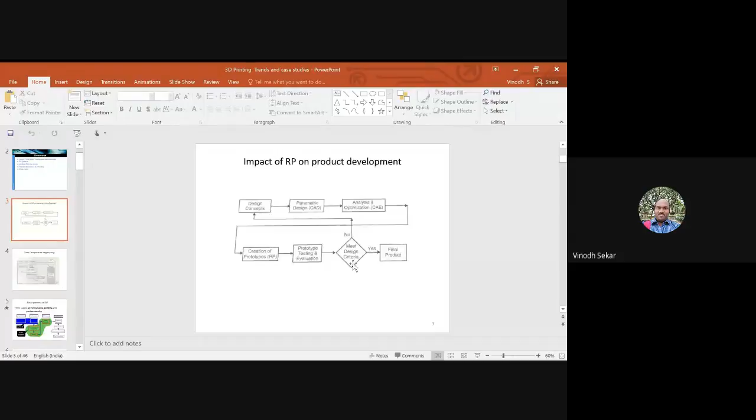Let me show the slides alone which I covered earlier. I started with the impact of layered manufacturing technology on product development, then discussed time compression engineering, covering both sequential and concurrent approaches and the significance of concurrent approaches. We discussed the basic mechanism of layered manufacturing, and then the fused deposition modeling process, where the raw material is in spool form, fed to a melting chamber with heaters that heat the polymer, and through the nozzle the molten polymer gets deposited layer by layer. We covered layer formation, advantages and applications in FDM, and now we move into the stereolithography process.

As I mentioned, the raw material is a liquid resin held in a resin tank, and a UV laser is passed onto the resin to cure it. It follows a point-by-point approach to create a layer. The layer is formed by the laser passed onto the resin tank, tracing point by point to build the layer. Once a particular layer is formed, the platform is lowered, and again the laser is passed so the resin is cured. This way the layer formation gets completed, depending on the number of layers needed as part of the build.

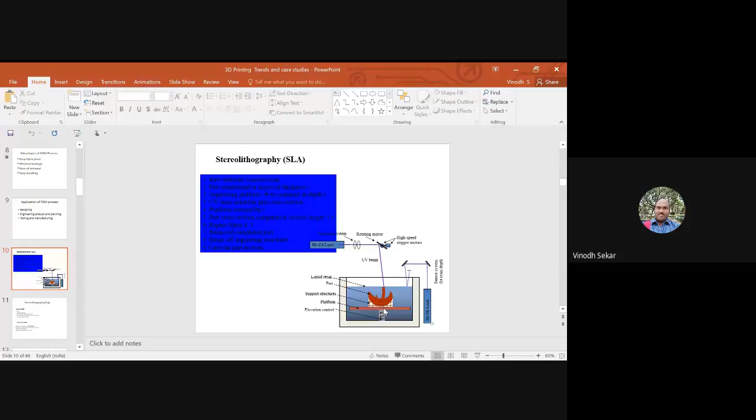The type of laser used is a UV laser. There are different advantages of this lithography process, and as per ISO classification, while fused deposition modeling is an extrusion-type process, stereolithography is called a photopolymerization process, specifically VAT photopolymerization. One unique advantage of the SLA process is good resolution and good dimensional accuracy. The equipment is slightly costlier since it involves a laser and corresponding optics, but the process offers good dimensional accuracy.

When the laser beam is focused to a spot size of about 1 to 2 micrometers, we could create thin layers of the order of 1 to 10 micrometers. So in this context, it has very good scope in this kind of precise applications, for example in automotive and aerospace component industries, even in medical applications. The reason is the advantage associated with the stereolithography process in terms of very good dimensional accuracy of the part.

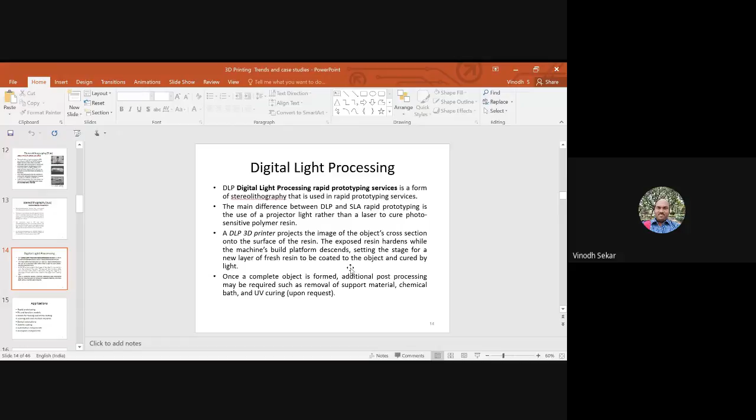The second difference is that in a DLP process, we use a projector light source to cure the resin, whereas with an SLA process, we use a UV laser. This is the second difference between the DLP and SLA processes.

But DLP also has very good scope, as I mentioned, like micro SLA. It finds applications in defense, automotive component industry, electronics component industry, and jewelry fabrication, where the precision required is of a higher order, and even in medical implants and some surgical aids, micro SLA and DLP also support as part of it.

So now the second process we discussed, this SLA process, and we discussed two of its variants, one in terms of micro SLA and the second in terms of DLP process. Now, having discussed the SLA process, the next process I would like to discuss is selective laser sintering, the SLS process. Here the raw material is in the form of a powder.

Here we could see there are two powder feed cartridges, and these two powder feed cartridges will feed the powder to the deposition chamber. Once the powder gets deposited in this chamber, the roller will spread the powder uniformly across the deposition chamber, and the laser will be passed. Here the type of laser being used is a CO2 laser. The CO2 laser will heat the powder bed to a temperature which is just sufficient to fuse the powders.

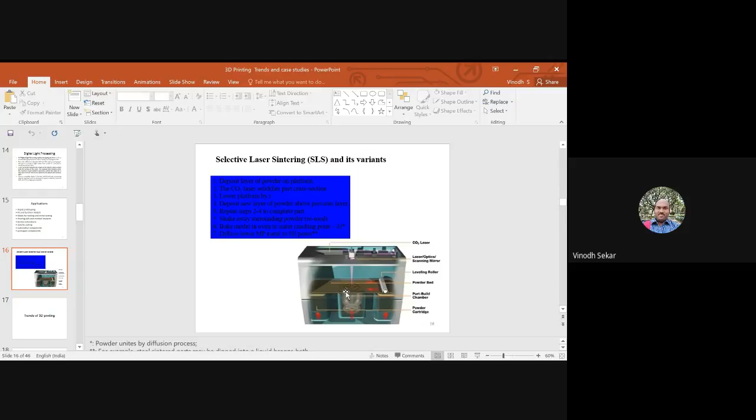Having discussed these concepts, let us move ahead with the trends of 3D printing to understand how the technology progressed, since we utilized 3D printing to a greater extent in the fourth industrial revolution. Let us try to understand and appreciate how the technology got stabilized over time and how it proliferated into diversified applications.

In the 1980s, we had the technology of 3D printing brought in line with the stereolithography concept by Charles Hull, with the hardware and corresponding software being used in those days. Then somewhere in the 1990s, we saw the 3D printer in line with fused deposition modeling by Stratasys, with hardware and interfacing software in line with CAD tools. This is how 3D printing started its journey.

In 2005, we saw the RepRap machine, which is a self-replicating type machine, meaning the 3D printer can print certain parts of itself. The idea is to build new printers from the existing one, exploring the possibility of printing parts of a 3D printer and creating new printers. But initially, it was not possible to build the majority of its components; only a few could be created using the 3D printer, making it a collaborative type of printing.

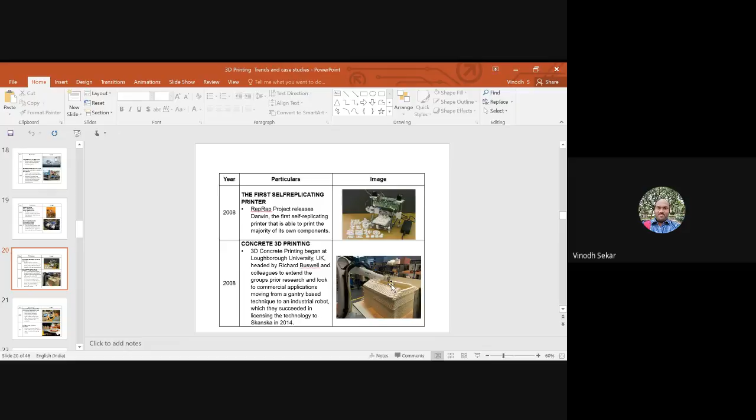Then in 2009, you could see the idea of 3D printers being used for personal applications, especially for kids. They want the toy of their choice, so they pick the digital file of their choice and give it to a 3D printer which can print that toy. It's an excellent example of customization, because we know we are moving ahead with advanced customization in manufacturing. This is a very good example of how customization is being witnessed in the context of personal applications.

Then somewhere in 2011, we could see the idea of 3D printing in the food industry, especially when we visit pizza shops in pizza making. They try to pour the pizza dough, the pizza mix, through these nozzles of the 3D printer very precisely. So in the food industry, the implementation had been continuing.

Now we could see the different technologies, as I mentioned: extrusion type additive manufacturing for FDM, powder bed fusion for SLS, photopolymerization in terms of SLA, and we also have binder jetting and other processes. But the technologies relevant for 3D printing, we discussed earlier. Now you could very well correlate why I have taken these three processes for discussion.

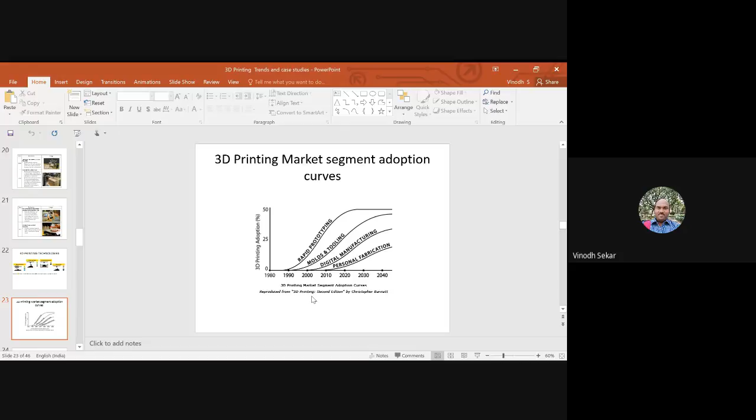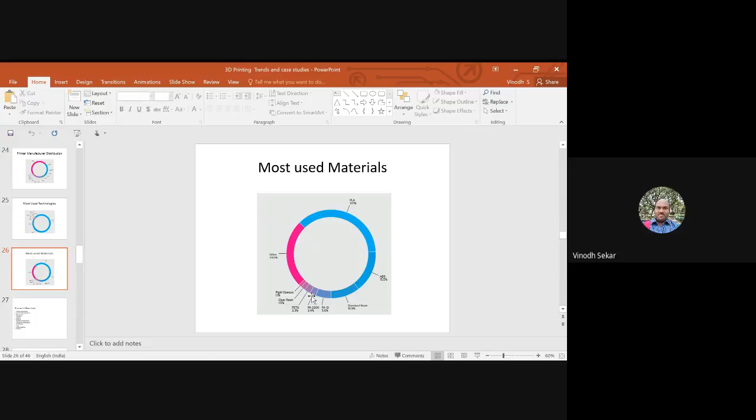Materials like PLA, ABS, polycarbonate, and polyamide have more applications, and of course other polymers are also compatible with 3D printers.

We could see 3D printers used in different applications, starting from automotive, aerospace, medical implants, biomedical applications, jewelry fabrication, construction, food industry, and personal fabrication. These applications are increasing more and more, which makes it interesting to see the trends in 3D printers, giving an idea of how the technology has diversified across multiple domains.

So far we discussed the fundamentals of layer manufacturing and the technologies relevant for 3D printers, then the 3D printer trends, materials, technologies, and manufacturers. Now we will proceed with some case studies to understand how, for what application, and in what context we utilize 3D printing, what challenges we had, and so on.

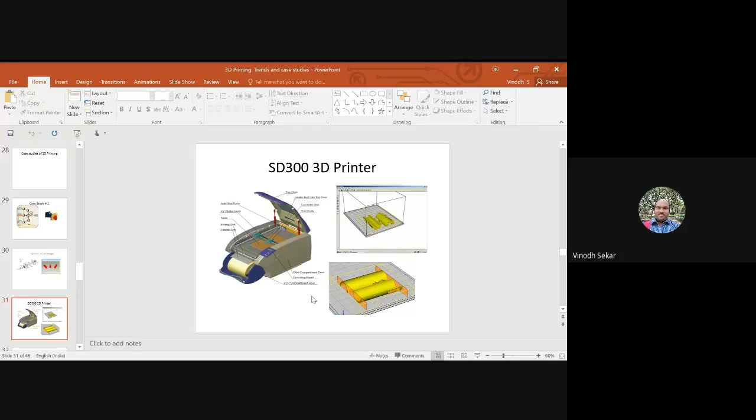The idea is that at the end you'll be able to remove the anti-glued part and get the actual part printed. One important aspect to note here is the orientation of the part.

Earlier, in the interfacing software module, we had to decide the orientation ourselves, but now the optimal orientation is indicated by the interfacing software. This helps us find the optimal orientation, because if by mistake a wrong orientation is chosen, it leads to more material consumption, more layers created, increased cost, time, and so on.

Now we have the concept of optimal orientation which the software module can indicate, and we can do certain optimizations during the design phase. For example, if I want to reduce printing time or optimize the product design, I can do that well here, optimizing certain parameters before proceeding with actual manufacturing. At the bottom, you can see the prototypes created using this printer.

The objective for developing the prototypes is to visualize the design, since the customer wants to visualize it. Second, we have a kind of torque tester in the company, so we could put the designs through testing to check whether they are capable of withstanding the torque or not. Accordingly, the prototypes made are capable of withstanding the engineering parameters.

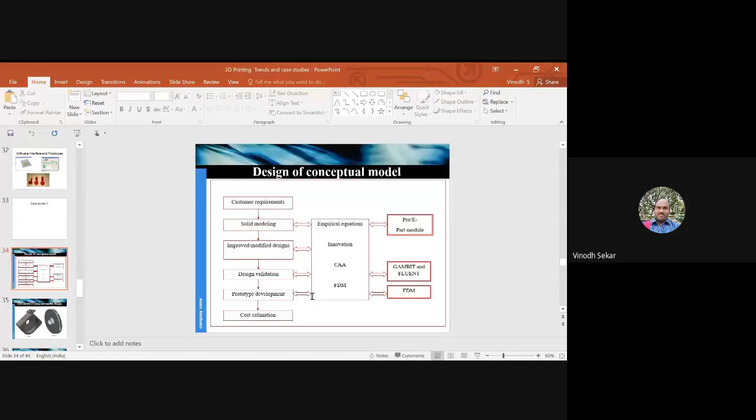As we all know, the pump design involves several parameters, with head and discharge being the input parameters. We take these input parameters and arrive at the new dimensions for the modified designs. The pump design involves several parameters - we take into account head and discharge values, and accordingly analyze the characteristic curves of the pump, and derive the impeller and casing dimensions.

But when we started with the project, it consumed more time in terms of computing the dimensions. Every time we need to analyze the characteristic curves, compute specific speed and other parameters, and accordingly arrive at the design.

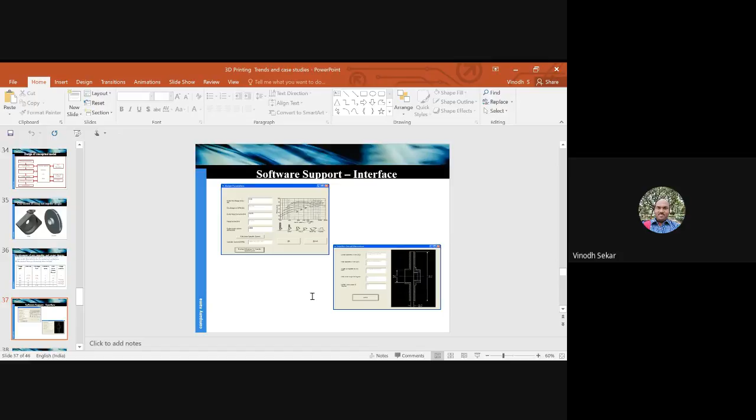So in order to overcome this challenge, we developed a kind of software support. Once I give the input parameters as head and discharge, it does the analysis and computes the impeller and casing dimensions. So multiple times I'll be able to arrive at the parameters, and once I finalize the optimal parameters, I can go ahead with the designs.

The second challenge is that this design process is iterative - we may have to work on several designs in order to arrive at the best design. So we went ahead with the parametric approach of CAD, so that once I define the chain of parameters in my base design, when I change the input parameters, this chain of design parameters gets changed on its own and generates the design. So I could generate my designs using CAD.

After arriving at the best possible design, we went ahead with the analysis - being a fluid component, we did CFD analysis, and accordingly checked the convergence of solutions, and arrived at the optimal solutions.

Next we went ahead with prototype making. In this context, we did it with an FDM machine. On the top you could see the STL file of an impeller, and at the bottom you could see the prototype of the impeller being fabricated. Here we did it with ABS, but if you see the actual material, it's a bronze alloy as part of it.

But here we went ahead with FDM, and subsequently did infiltration using material powders, and we could enhance the strength. Once we enhanced the strength of the prototype, we had a test rig in the company through which we could test this impeller with regard to the properties. Once it fulfilled the properties, they took it further for the actual manufacturing of the components.

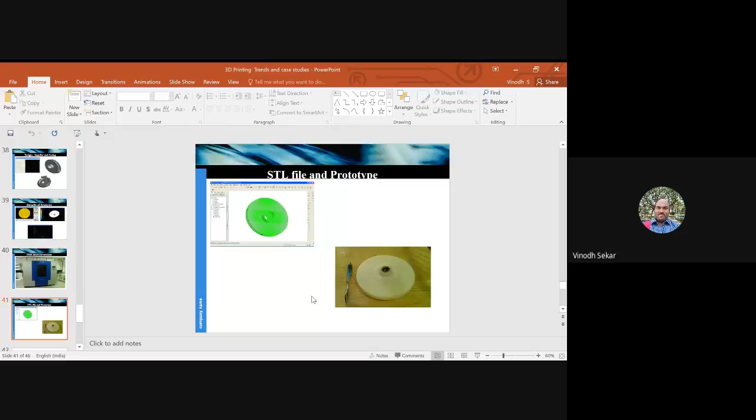These are some of the components we printed in our lab. On the top left, we could see a medical gripper. On the top right, we could see a kind of guide vane runner.

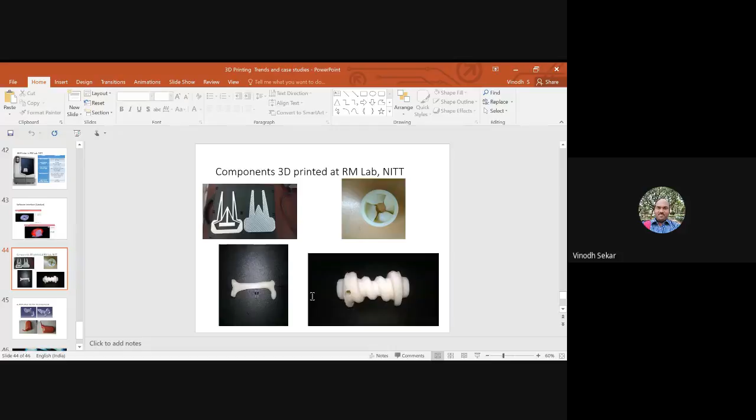In the bottom left, we could see a kind of femur bone for a medical application project. On the bottom right, we could see a kind of shaft for an automotive application. Next, we worked on an automotive mirror development project for an automotive industry. These are some of the projects we did in our lab.

Before we go ahead with the second module, I would like to mention that additive manufacturing is a key technology which is going to take a much higher lead in Industry 4.0, and there are a lot of advancements in additive manufacturing.

As I mentioned, some of the technological advancements include moving ahead with 4D printing. Next, we are working on design for additive manufacturing.

As we do in subtractive manufacturing, a design which is made has to be manufactured. Keeping in mind several aspects, we explored in additive manufacturing how a design could be additively manufactured, for which there are different principles to take into account, since there are several technologies. Improving the feasibility of additive manufacturing through DFAM is also very essential.

The second important aspect I would like to mention is optimization. Generally in subtractive manufacturing, we do a lot of optimization, maybe process parameters and other aspects. But here, we may have to work on the topology of the shape. Topology-based optimization is very much essential for additive manufacturing.

Industries work a lot towards optimizing these kinds of structures, especially the lattice structures and lightweight structures, which are very essential for automotive or aerospace component industries, including defense applications. So it's more interesting to explore these technologies.

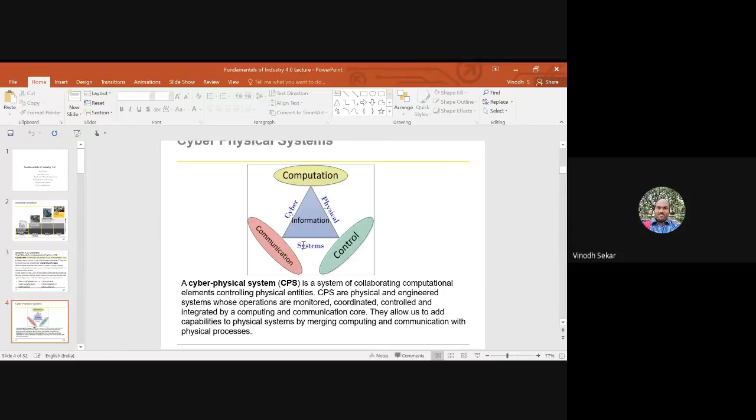So definitely these kinds of collaborating computational elements have to be designed in order to control the physical entities as a part of it. CPS has a greater role in terms of coordination, in terms of interface with the human and machinery, ultimately, along with robotic systems, in order to ensure that the smart factory is able to run.

We could see the scenario of present factories which we have, in line with the 3.0 version, wherein the systems have been incorporated with flexibility. And of course, we have robotic systems which have to communicate and coordinate. The flexibility and versatility we may have to increase a lot as a part of it.

The systems we develop, say for example the robotic systems, sometimes they may have to be autonomous in one sense, and also collaborative in another sense, coordinative in another sense. Likewise, we try to enhance the versatility. We could see the workstations, and we may have to deal with completely customized manufacturing, working with a fully flexible and integrated system, with coordination between the robotic systems and the workstations accordingly.

The CPS has a key role in coordinating with these elements ultimately, so that we'll be able to make the smart factory configured and reconfigured in line with the changes that happen in the manufacturing systems.

Now, there are several principles governing this kind of Industry 4.0 system. The first one is about interoperability, wherein it is the ability of CPS, as well as the human and the smart factories, to coordinate and communicate with each other, for which they need IoT and IoS, through which they will be able to communicate and coordinate with each other.

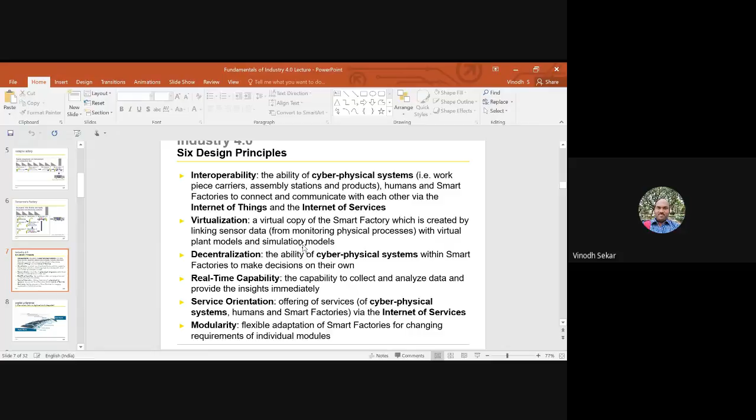So here we could see the complete value chain is digitized and it is completely integrated as a part of it. So linking this physical world and the virtual world is an important challenge for Industry 4.0 or the smart system.

Next, it is more interesting to see the kind of skills requirement, because if you see the skills required for the Industry 3.0 system and that of the Industry 4.0 system, it is slightly different in the sense Industry 4.0 requires certain unique capabilities.

If we note some of the unique capabilities, one is about emotional intelligence as a part of it, because we have to bring about complete innovation in terms of product development, materials development, process development, a lot of innovation we have to bring about.

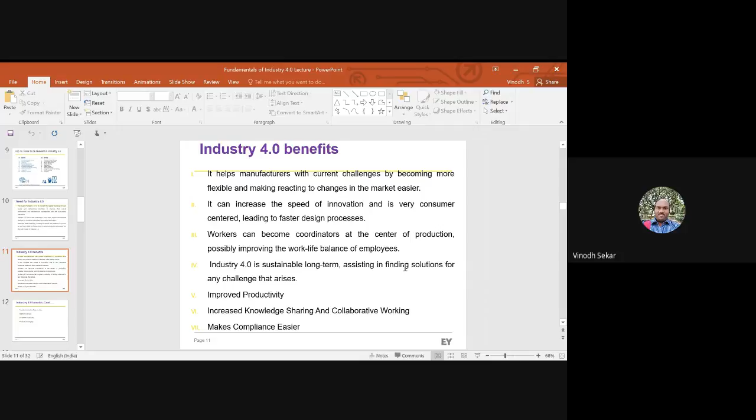Next, if you see the benefits of an Industry 4.0 system, we will be able to make manufacturing enterprises flexible, and they have to be made reactive to changes in market conditions. We may have to enhance the innovation speed and find long-term solutions for the problem. We need to have a long-term vision, and of course the productivity aspect is also there, along with the collaborative pattern of working and more innovation opportunities.

So if you see some of the classical questions which come into picture with an Industry 4.0 or smart system, regarding job opportunities - actually the opportunities are more, but the skills requirement is different. That's what I showed in one of my earlier slides, about what kind of skills are needed for an I4 system. Second, the learning aptitude or innovation-oriented thought is very essential as part of it.

So such opportunities which we create will help employees think from different perspectives, which is very essential.

We may have to take into account the interaction between the complete materials, product and process phenomenon, and unique solutions have to be brought about. This creates profitability and other benefits. We'll be focusing on higher levels of flexibility and agility, meaning the system will be more versatile. It has to be highly responsive to changing requirements - these are very essential.

Then if we try to see the definition for an I4 system, the one on top is a widely referred definition. Let us try to understand it. It tries to create a smart factory where it brings together several technologies like big data analytics, Internet of Things, additive manufacturing, cloud-based systems, robotic systems, and so on. A variety of technologies are implemented to form a CPS - cyber physical systems - as well as the human equipment interface.

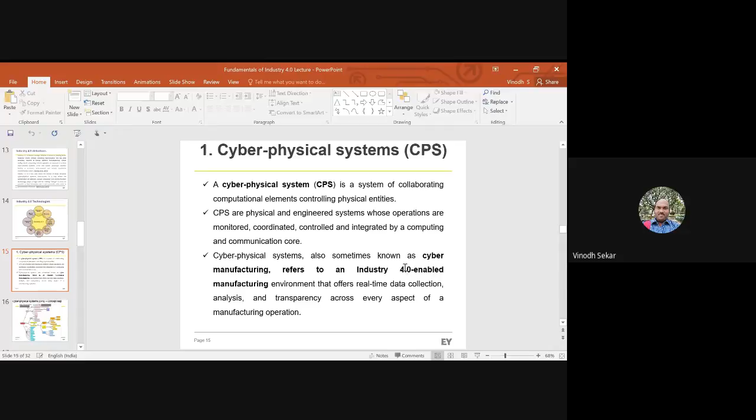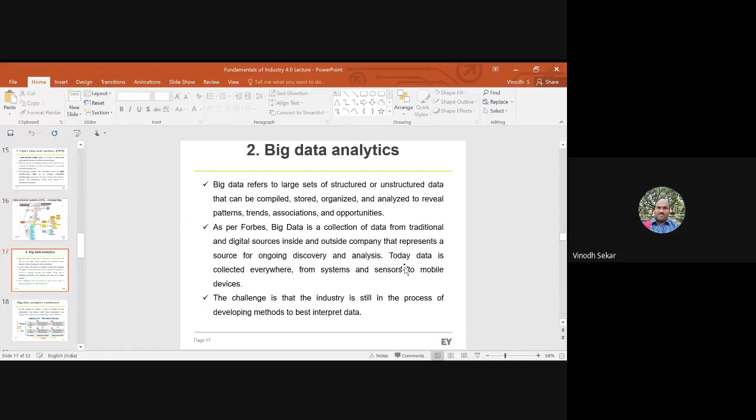So the next technology is about big data analytics. As I mentioned, data collection, data analysis, and deriving patterns, trends, and inferences is very essential as a part of it. But the kind of data we are going to operate and handle is big data.

The term big data denotes not only the volume of data, but also the variety of data, different forms of data, and other aspects. In this scenario, we need to always find new solutions to new kinds of problems we may get. We could see how robust or advanced the analytics should be in order to deal with this situation. Data analytics is one of the key aspects of any manufacturing system, and it holds good even for an Industry 4.0 system which deals with big data.

So the next technology for discussion is horizontal and vertical integration. If we take horizontal integration, here we will try to establish partnerships among various stakeholders, and ultimately form partnerships even with competitors and other firms, because I have certain core competence, my partner has certain core competence, and we take ahead with the business venture.

Next, if we take vertical integration, majority of the activities try to utilize the in-house competence, like starting from product design, product manufacturing, distribution, and so on. But in Industry 4.0, both integrations are needed - horizontal integration for finding partnerships, and vertical integration for in-house capabilities.

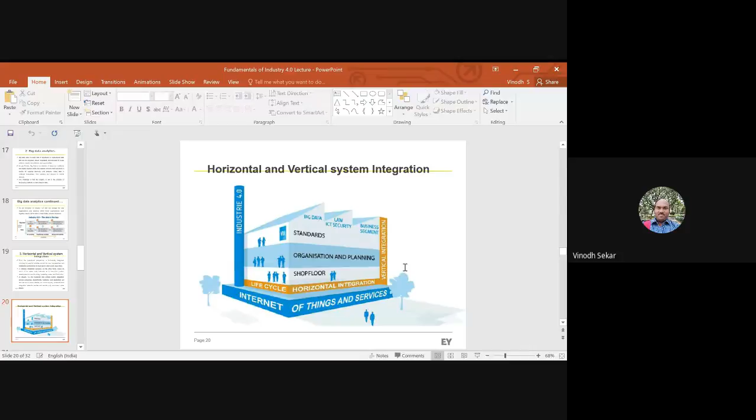Ultimately, we could see there are different technologies which can support this, like lifecycle management tools, and big data and IoT also support us in order to take ahead with this horizontal and vertical integration.

Next, about additive manufacturing - as we had a lengthy discussion on additive manufacturing, there are several technologies. Now we are moving ahead with advancements in terms of metal printing and other aspects, especially to deal with lightweight structures, complex geometries, and so on.

That's where I mentioned the optimization and other capabilities that also need to be focused on as a part of additive manufacturing, because it is going to be the leading technology, and many conventional manufacturing systems are going to get transformed through additive manufacturing, taking a lead in industrial developments.

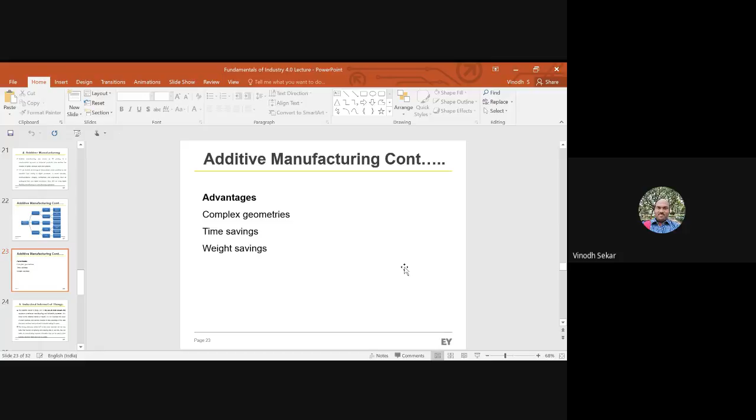Next, about the Industrial Internet of Things - here we try to utilize smart sensors and smart actuators, ultimately to leverage the challenges we may have to take ahead in order to facilitate better decisions. We will be having a lot of integration through sensors, actuators, and communication modes, including robotic systems, in order to have complete coordination.

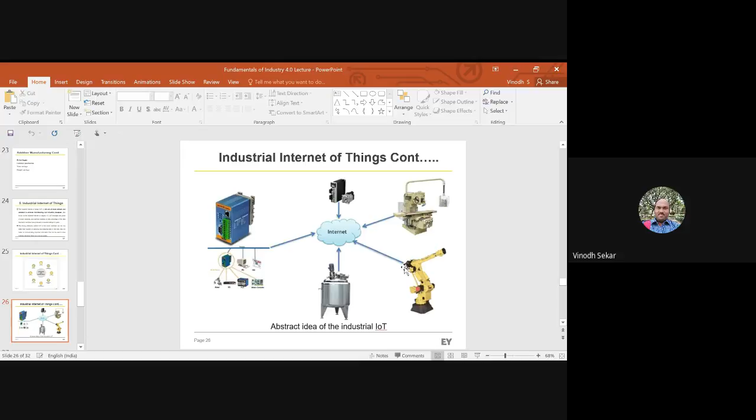We could see an abstract idea of an industrial IoT, wherein we see robotic systems, machine tools, sensors, actuators, processors, and communication protocols, which are also very essential. Beyond TCP/IP and other protocols, a lot of protocols like IEEE-based and ZigBee, and a variety of protocols are being used, including product recognition schemes. They have to be supported in order to execute the challenges of this kind of smart factory.

Next, about the augmented reality system.

In augmented reality systems, we try to provide an interactive experience of the real world, incorporating AR technologies into applications. For example, if I have a machine tool and want to see its complete history in terms of breakdowns and downtime issues and how they were rectified, instead of referring to manual history cards, the complete data will be available through an AR system. We'll be able to visualize the complete maintenance aspect of the machinery, supported by cloud systems as part of it.

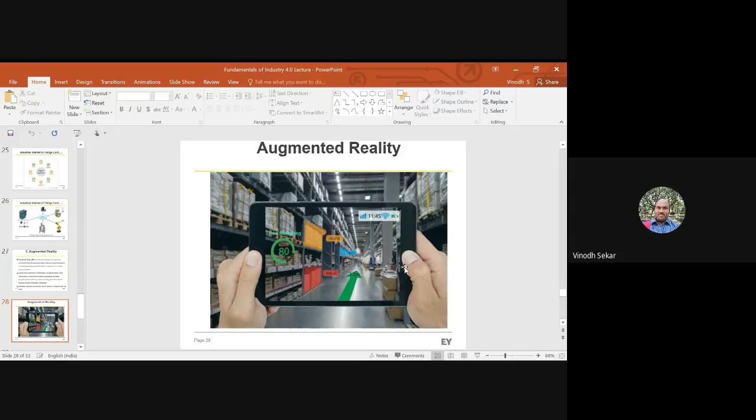For example, some production-based parameters and maintenance-based parameters could also be monitored from a remote location. These AR systems are very supportive of digital modes of operation, and they help ensure workplace safety as well as operator safety. It also provides a complete mechanism so that various machinery and equipment can be sensed as part of it.

So it gives us a fair idea about the different technologies involved, and these AR systems are also very essential in monitoring many maintenance and quality parameters, because we have multiple machine tools that could be operated and monitored from a remote location, and these AR systems support us. But AR systems need to be supported with the Internet of Things and other cloud-based applications, which will help a lot in taking ahead these kinds of challenges.

So this is about the Industry 4.0 system. Ultimately, we are moving ahead with a smart factory as part of it. In this regard, the challenges we have and the applications are diversified. We have a great role in taking ahead these kinds of systems for implementation. Okay, so this is about the Industry 4.0 system, the second module of my presentation.

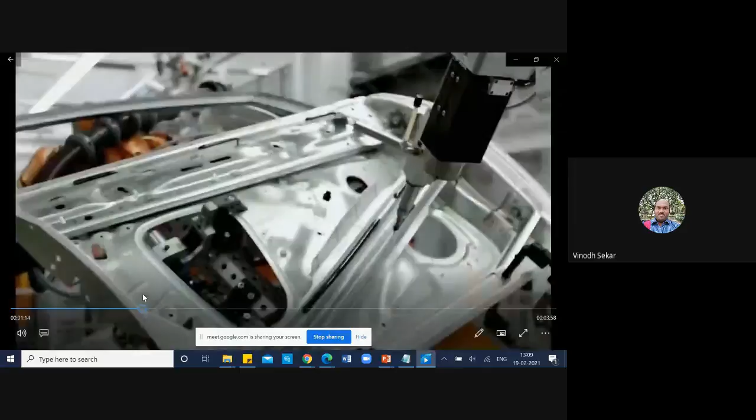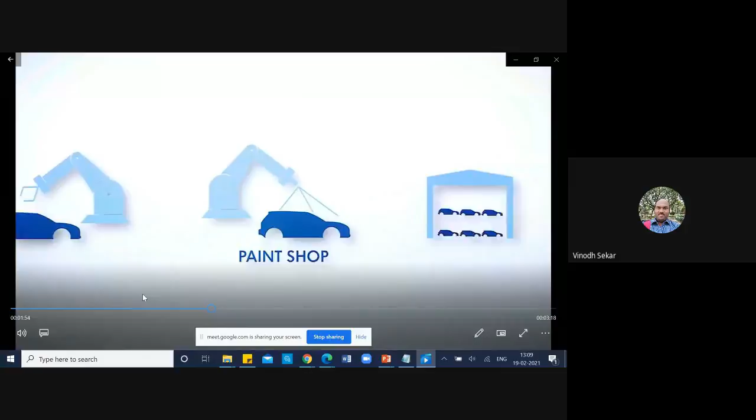The future of car manufacturing is also changing in a similar way. In fact, the next batch of innovations is so extraordinary that experts are already declaring the dawn of a new industrial era, Industry 4.0. So what does manufacturing look like today? Traditional car production involving hundreds of identical vehicles lined up in a row no longer exists. The options available to customers are now so vast that each car becomes a unique and individual object. Cars are now manufactured to order. Data makes its way from the customer's order to the Volkswagen Group's systems and then to each individual section of production. A car consists of many thousands of individual parts. The press shop processes blanks for the bodywork. In the body shop, the car is baptized - in other words, it's given an RFID tag that can track it via radio frequency. This establishes which car body belongs to which customer order. The paint shop also receives information from the system as well. In sequencing storage, the cars are placed in an optimal order for assembly. From here, information is transmitted to suppliers and pre-assembly as to which part is required when and where. In final assembly, the finished car emerges. The Volkswagen Group manufactures its cars using state-of-the-art technology, but development and innovation never stop. What does the future hold in store?

Today, everybody is talking about Industry 4.0. It is a term used to describe a variety of innovative production processes. But what exactly does it mean?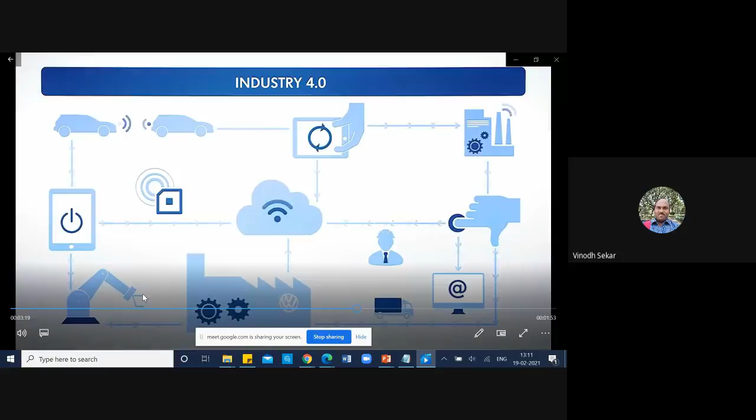The Volkswagen Group has been shaping the future with groundbreaking projects for many years. Here are some recent examples. Digitalization: the digitalization of all elements of production is essential for a new era in industrialization. Everything is given a virtual likeness in the system world.

The result is an Internet of Things. Example, 3D printing: pressing tools are no longer shaped in a laborious manner. Instead, these tools can be made from steel granulate in a 3D printer. It's a technology that opens the door to completely new possibilities for design, with a level of precision unknown until today.

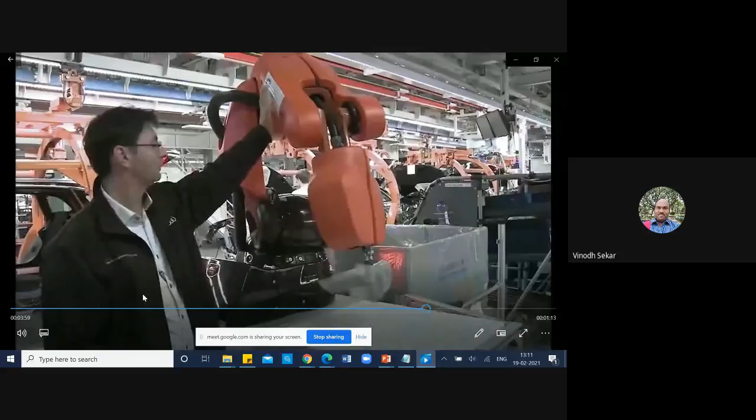Example, human-robot cooperation: in the past, protective grids separated robot arms and employees. In the future, employees and robots will work increasingly hand in hand. This is made possible by new security sensors. Robots take on especially monotonous and arduous activities. Today, robots already play a part in contributing to ergonomic workplaces at the Volkswagen factories in Chemnitz and Salzgitter.

Example, big data monitor in logistics: the big data monitor enables rapid visual processing of data from the 1,200 suppliers of the Audi factory in Neckarsulm. Where are the potential bottlenecks? Where is the greatest need for action? This data is now easily accessible at all times.

The intelligent factory of tomorrow paves the way for efficient and cost-effective production unlike ever before.

Industry 4.0 also means brand new opportunities for employees. The Volkswagen Group has already begun actively preparing its workforce for the future. The world is changing, not only in the automotive industry. Everything is in motion, and the Volkswagen Group provides the technology that moves the world.

So now from this presentation, the video file, we could see the Industry 4.0 implementation activities in Volkswagen Group. Prior to that, they have shown the complete sequence of manufacturing activities involved in car manufacturing, and they mentioned how they have gone ahead with the Industry 4.0 implementation, especially in terms of complete digitalization, wherein we could see the powder bed fusion additive manufacturing technology, the robotic system, how the robot is coordinative and responsive in line with the interface between the robotic system and the human, we could very well see, and big data analytics, how it is being deployed, and the RFID-based mechanism, product recognition mechanisms, and Internet of Things applications. So it's an excellent video which clearly shows the Industry 4.0 technologies being implemented.

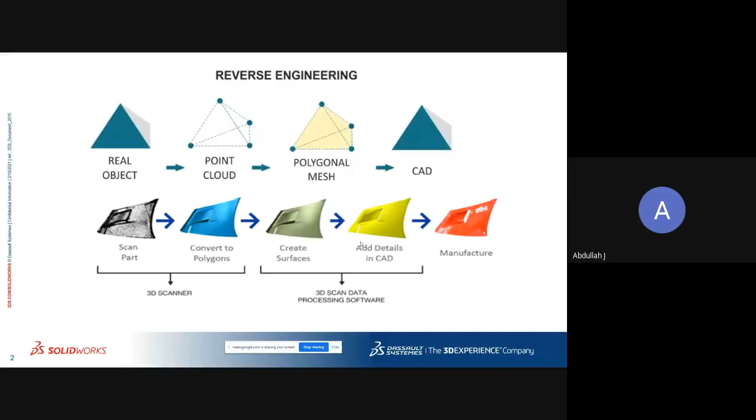Okay, let me open SolidWorks. So whenever I want to open an STL file, we don't need to go with import and all that. Directly SolidWorks supports most of the neutral file formats, so directly we can open a file.

STL file - sorry for this one, sir. Voice is very low, sir. Sorry, your voice is very low. Am I audible now? Now it is clear, sir. No issues, I can manage. Sorry for that, sir. Okay, sir.

Okay, I'm going to show a simple example of how we can convert mesh data into a solid model. Obviously, whenever we are talking about additive manufacturing, it is all about non-conventional manufacturing. So we do reverse engineering to change the design or modify the design. Whatever design we do, we will go with additive manufacturing or prototyping. That's what we are going to see - how SolidWorks is going to help. As I mentioned earlier, if I want to open an STL file, that can be directly opened in SolidWorks environment. So let me open an STL file.

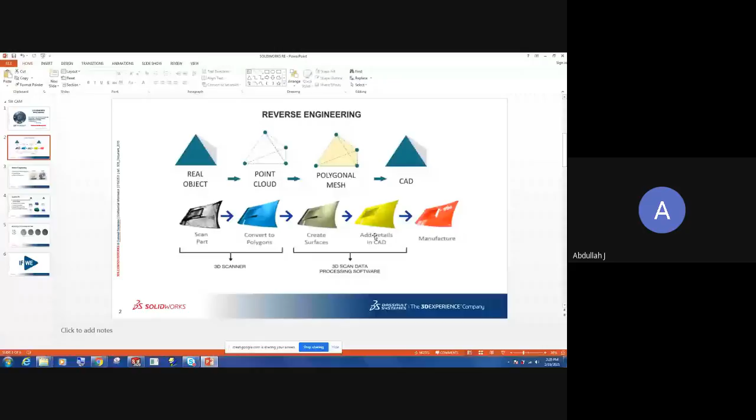But from the recent versions, SolidWorks has a very good option to support this kind of reverse engineering. Say, for example, I have graphics data and I want to directly convert this graphics into a solid model or a surface model. Then simply I can right click on it, and directly I have an option.

The best part about SolidWorks is the user interface. Whenever we select something, automatically SolidWorks suggests relevant options for what we can do with the selection. So here I have mesh data. When I select and right click, automatically it shows options which are relevant to convert a mesh body into a solid body.

The first thing is convert mesh body. So we have graphics data and we want to convert it into a body, either a surface body or a solid body. If you want to convert graphics data, simply click on this option, and automatically I can just give OK.

So all the graphics will be converted into a surface model. See here, I got a surface, and here also I had a surface body. But obviously, when I want to go for manufacturing, I need a solid body, and here I got only a surface body.

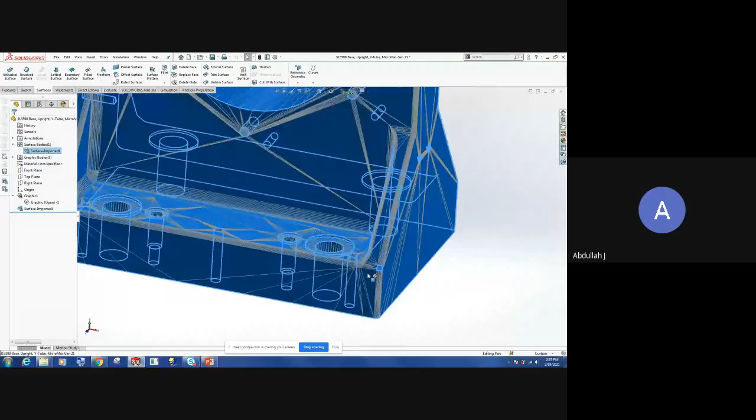So in that data loss region, we don't have any surface formation or any polygons. If that is the case, how can we modify the scan data easily to create a solid? That's a major thing. So if you take this mesh data, there is a small opening here in this corner.

You can visualize the opening here. Rest of the things are normal, it's a through hole. But only here at the corner, since it's a filleted corner, these areas are not captured properly.

So without patching this, I can't go for a solid model. For patching, SolidWorks has a lot of surface options. We can use some surface option to fill this region. That is one perspective.

But still, say I'm not familiar with surfaces, but I want to remove this hole, I want to patch this hole. If I want to do that, there are some easy ways too. We just need to select that hole, right click, and go for the option called delete hole. By using this option, automatically SolidWorks will patch that region.

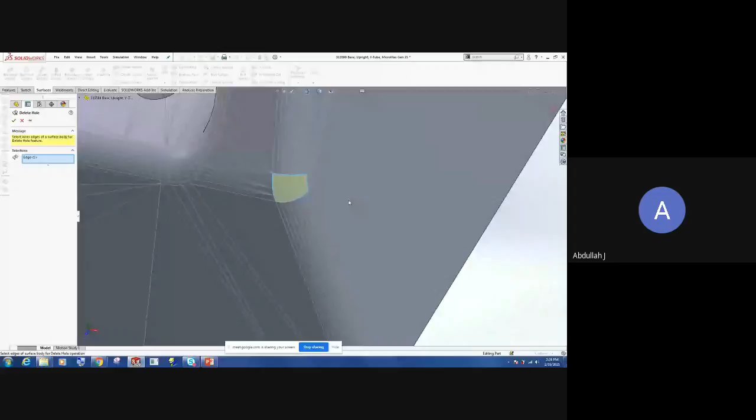So simply I am giving delete hole. See here, once I give delete hole, automatically that hole will be patched. So I can go with OK, and those holes are patched.

So now my model becomes a completely closed model, but still it is in a surface body only, but that's not an issue. Once we got a completely closed surface, easily we can convert that surface into a solid body.

If I want to do that, I have an option called thicken. I can use the thicken option in the surface command manager. I can select the body, and instead of giving thickness, if it is a closed surface and I want to create a volume, there's an option called create solid from an enclosed volume. Simply I select that object and go for OK. Once I give that option, directly our surface body will be converted into a solid body, as we can see here.

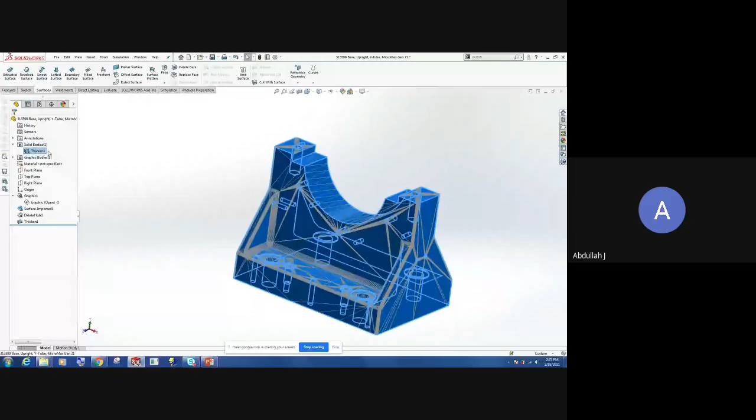That's how simple it is. Whenever we have scan data, if we want to create a solid model, easily we can convert it like this. Once we got a solid body, it contains all the information. Even if I go with a sectional view, I can section my model and visualize my internal regions. But this cannot be possible with graphics data.

So this is the advantage of the tool, going from scan data to a solid body. Now if I want to measure any mass properties, easily I can apply some material and check the mass properties. That is for our understanding. Whenever we go for a prototype, we need some information, and we can get it directly here. Also, once we have a solid body, if I want a manufacturing drawing, we can do some drafting, generate orthographic views, and get manufacturing-ready 2D drawings.

So this is the first scenario. Using SolidWorks, we can open mesh data and convert that mesh data into a solid body. Now I can open another model.

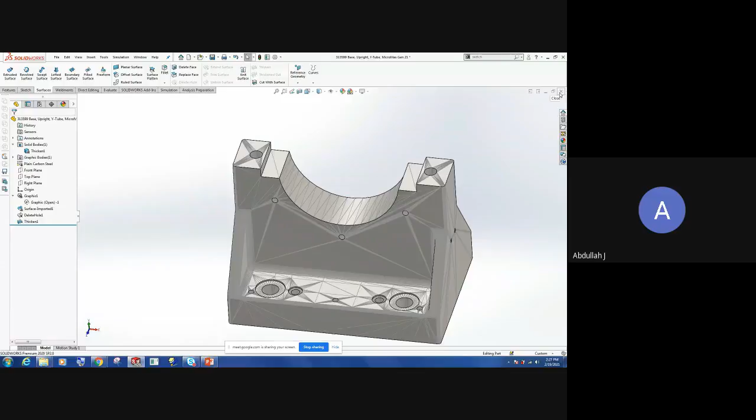These kinds of reverse engineering are largely used on the medical side and others, to develop implants. For that, they scan the data.

So again here I have a scan data of an arm. Apart from directly converting mesh into a solid body, we can do some decimation also. Decimation is, as we all know, whenever we have a large number of points we can achieve high quality. Mesh data will be very perfect based on the number of scan points. But on some occasions, if we have a large number of scan data, it becomes complicated to work on our systems, since our system memory won't support working with large cloud data points.

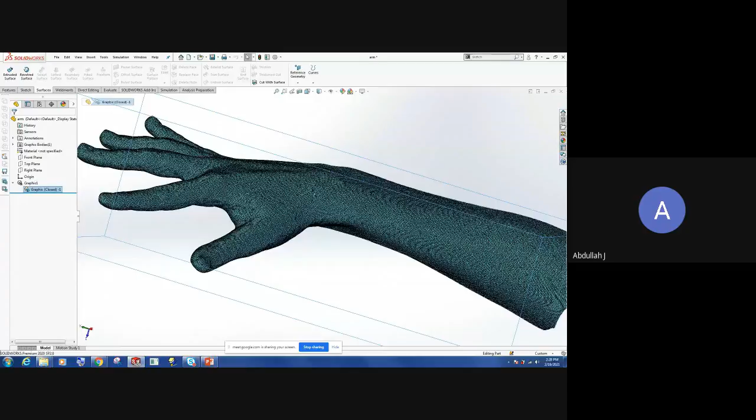So if I want to simplify the mesh data, I don't want more accuracy, I want a rough model. If I want to simplify the mesh, that can also easily be done in the SolidWorks tool. Say for example, this contains a set of some cloud points. I want to simplify it, I want to reduce the set of cloud points. Then what I can do is go with mesh decimation.

For decimation, simply I can right click on the graphics data and go with the second option, decimate mesh body. Then I can choose the decimation. By default, this arm scan data contains around 1,44,000 meshes. The facet, in the sense each polygon shape or triangular shape, if I want to simplify, I can easily work on my system.

Because if I have a large number of cloud points it takes a lot of time, and obviously we always want more accuracy, but for the initial stage I don't need any accuracy, I just need a rough model for my prototype. So if I want to reduce the number of elements, I can go with decimation, where I can control the percentage. If I want to reduce 20% of the element count, the number of facets automatically goes down from 1,44,000 to 1,15,000. If I reduce it by 35%, the data automatically reduces to less than 1 lakh. So simply I can go with calculate.

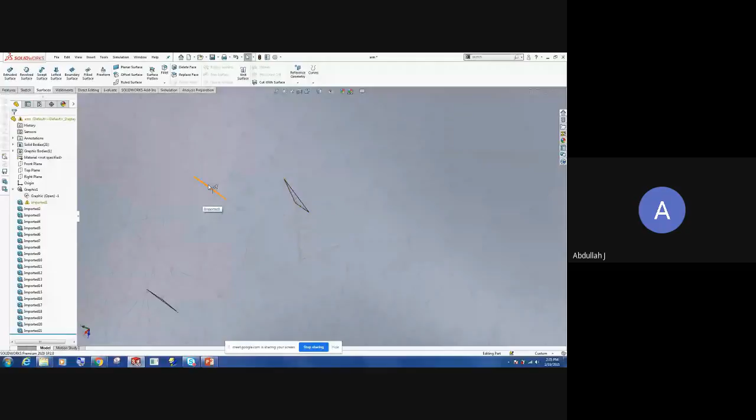Actually, based on our facet reductions, a lot of holes have happened, that's why it is imported as multiple solid bodies. As I mentioned earlier, whenever we reduce the facets or reduce the scan data, we won't get accuracy. That is a major problem.

This scan data is a very complicated curved surface, so that's why we get these kinds of errors. But if we have simple geometry with a scan data having a large number of mesh, that's not feasible for our system since it takes a lot of time while working. So if I want to reduce the scan data, I can directly go with the decimations. Now most of the regions are converted into solid, so we can see the solid data.

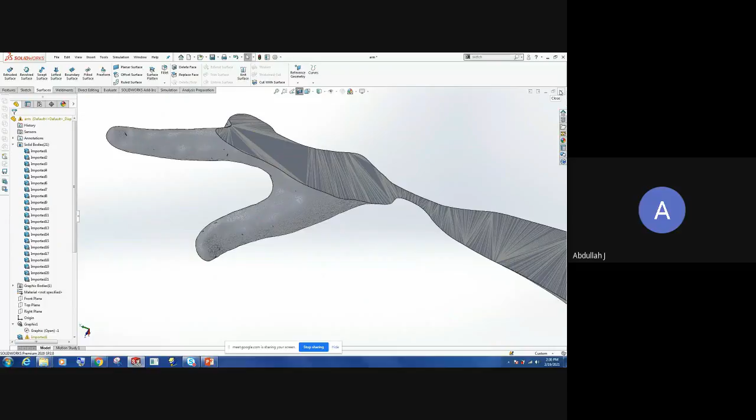In this way we can use SolidWorks for accelerating our reverse engineering process, from the scan data to a solid model. I hope this gives an idea about the first scenario, how we can work with scan data in SolidWorks.

We will move on to the second scenario. As we discussed in the initial stage, the second scenario is when we don't have any real object, only some reference image, and we want to develop a component, a CAD model, based on that image. So in that case, how can we use the software? Let's see that second scenario.

I will start with a new part. Obviously, if I want to create a solid model, I need some sketches. We can trace an image and develop a sketch. That can be done in all the software, but in SolidWorks it will be a little bit easier.

Say for example, if I'm going with the sketch, and in the background I want a picture, it will be easy for us to trace out the picture and develop a model. So in that scenario, we can easily bring a picture, either a JPEG image or any kind of picture format, onto the background of the sketch plane. To do so, I can go with Insert Sketch Picture tools.

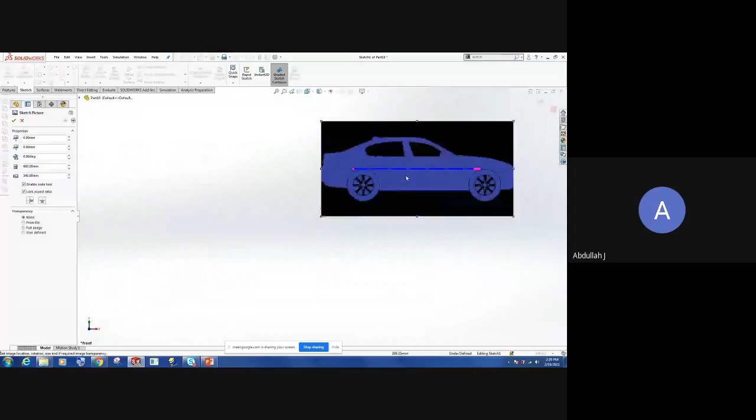So we have an option for sketch picture. Using that directly, we can bring down our images. Maybe I can select an image, and automatically the image will come onto our screen.

Now I need to scan all the outer edges. To do so, we can do two kinds of tracing. One is manual tracing, where we can keep the picture in the background and use some sketch options to trace out the outer shape. For example, I can use a spline or line option and draw over the image. That is manual tracing, where we manually draw all the boundaries.

But in SolidWorks, we have an option for auto trace. The software itself automatically traces all the boundaries. Whenever we have a single colored image, based on the color we can trace our image boundaries. I will show you.

I can double click on my image. Once I insert the picture, there is an option for next. I can go with next, and here there are some selection tools for tracing. For example, I want to trace based on this color, so here there is a color picker. I can use this color picker, select a color, and go for begin trace.

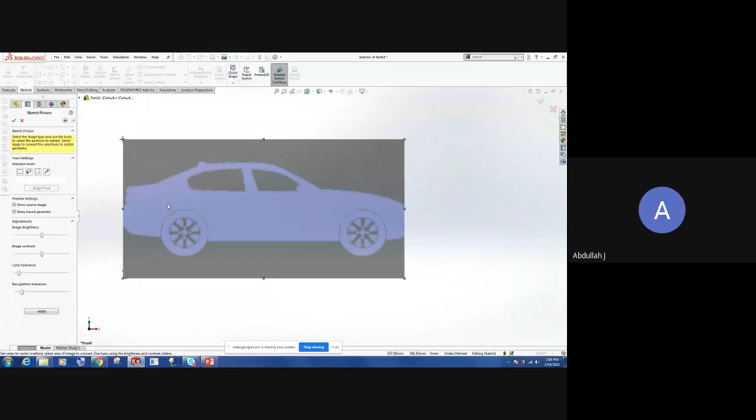So if you see now, automatically I got a sketch on the boundary, a rough sketch. Within a single click, we can generate the outer profile. Obviously we won't get 100% perfect tracing, but somewhat it can match the geometry.

This tracing is greatly based on the image resolution, so it is going to be traced out accordingly. But here our image quality, the resolution, is a little bit low, so the tracing is not very effective. We can control the tracing based on image brightness, where and all we want to scan, the contrast, even the tolerance, the sharpness of the image, everything we can take into account. Even the recognition, where and all it needs to recognize.

So with the help of this color picker, quickly we can convert an image. Simply we can take a photograph, upload it to our system, bring that image to the background, and quickly use auto trace.

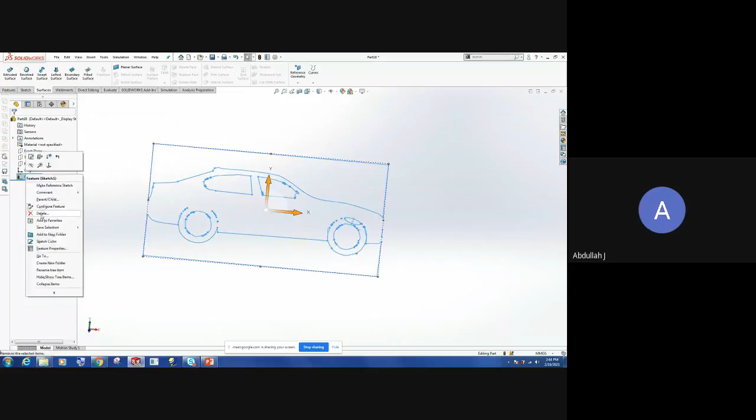Maybe I can show another example. This time I can go with some blueprint kind of thing, or some orthographic views. I have considered only a single image, just going with that.

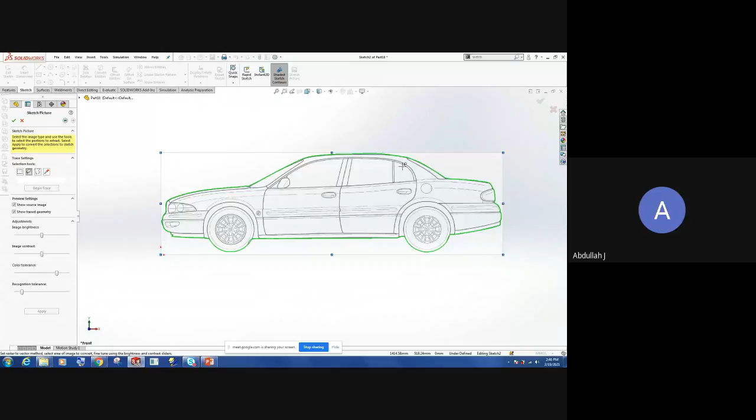Maybe I can suppress. So I got the overall outer structure. Now this can be easily converted into a solid body or a surface body, so other modifications can be easily done from the base model. So this is one way.

As I mentioned about the other scenario, if I want to select a particular area, if I want to trace out a particular area from an image, say for example I want to trace out this rim shape, then I can go with next. Here I can use some selection tool, so I can select an area where I want to go with the tracing.

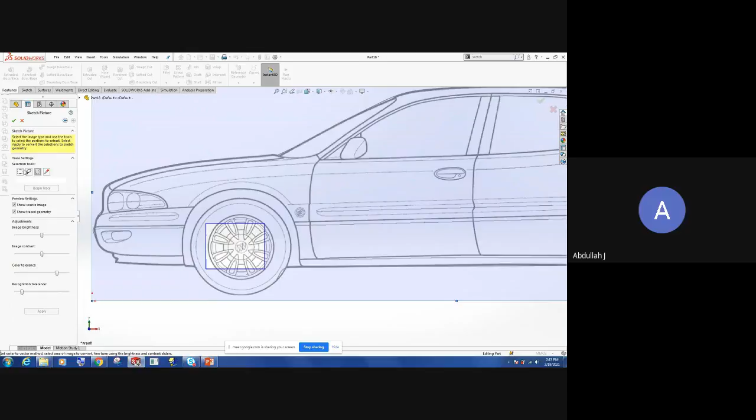So already a selection is there. Based on that selected region, automatically tracing will happen. Actually, due to some graphics issue, it's not showing the selected region.

Okay, so if we see here, based on the selected region, automatically it got, wherever it is possible, the image traced out and a sketch is developed. As I mentioned earlier, it's not going to be more perfect, but maybe we can adjust the image brightness and other parameters to somewhat match with real time.

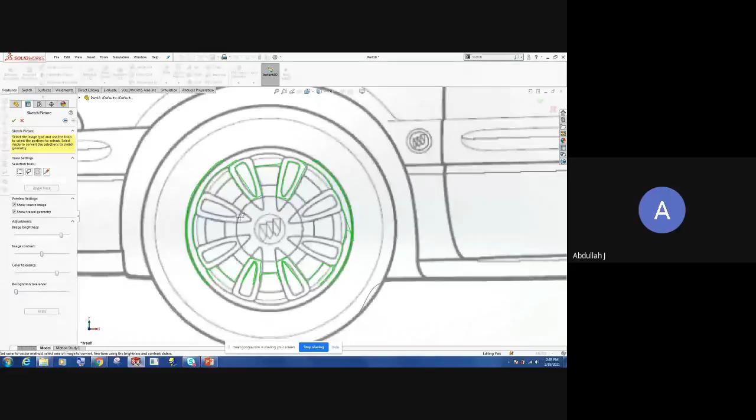So this is how we can use SolidWorks for the second scenario. That means we have an image, and from the image we need to develop a solid model. Again, this is also a part of reverse engineering. So hope this is also clear.

So we will move on with a third scenario. The third scenario will be: we have 2D data or 2D drawings, either done in any 2D software. So from the 2D data, we need to develop a solid model quickly. Generally, what most industries do is they see the diagram, manually start sketching based on the dimensions, and develop a 3D model.

We all might have seen a lot of engineering services companies doing this kind of 2D to 3D conversion. But for example, we have a 2D file, say it's in 1:1 scale, but they haven't mentioned any dimension. If that is the scenario, it will take a lot of time to convert those 2D data into a 3D model. First I need to measure all the parameters, from that I have to recreate a sketch, and after creating the sketch only, I can go for a 3D design.

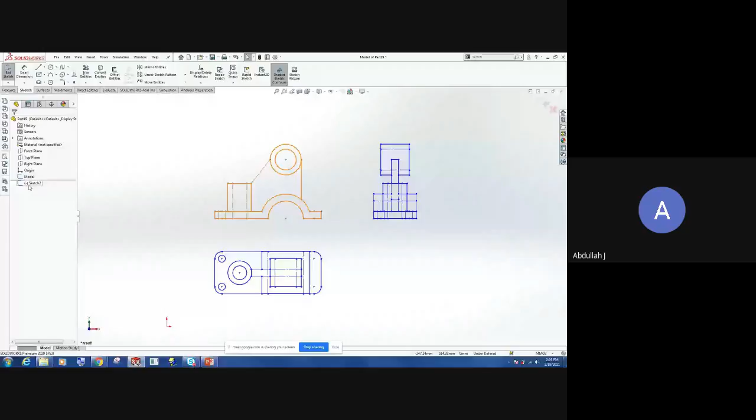Now that particular portion will be transferred to a new plane. And this one I want to align in a top view, top plane, perpendicular to this view. I can select these regions and align them to a top sketch. So we can see the difference. Easily we can align it.

Similarly, for the other region, if I want to align in a side view, either right side or left side, I can go with the right sketch. So all these sketches will be aligned to a particular direction.

Sometimes we can align the sketch to exactly match the other views also. For example, if I want to align this right view exactly from this point, that can also be done. I can go with the exit sketch. There is an align sketch option also. Sometimes it can be moved, but sometimes, based on the reference, because it needs to move a lot of entities, it won't align. But we can check it out, okay?

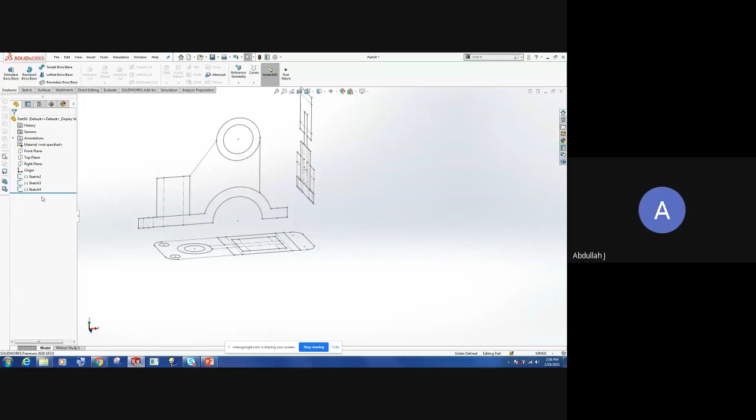Just give me a minute, I will reinsert it again. Maybe I can align it once again. We'll just check.

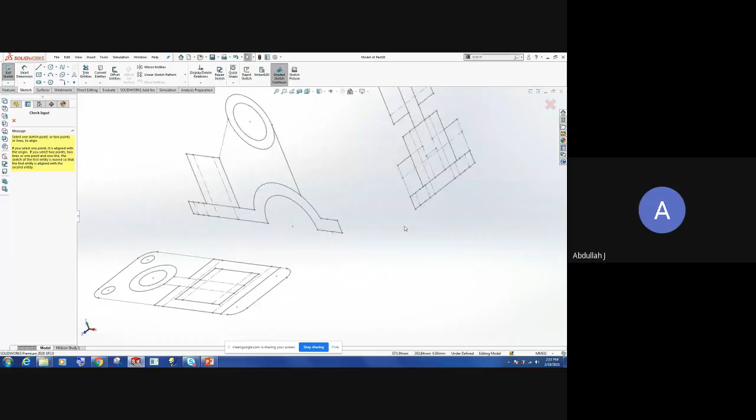Okay, no issues. As I already mentioned, each sketch will have a lot of entities, so sometimes it is complicated to align because all the references tend to break. To avoid it, maybe we can directly use the existing thing and simply align it to a respective plane. Then we can go with the solid model creation.

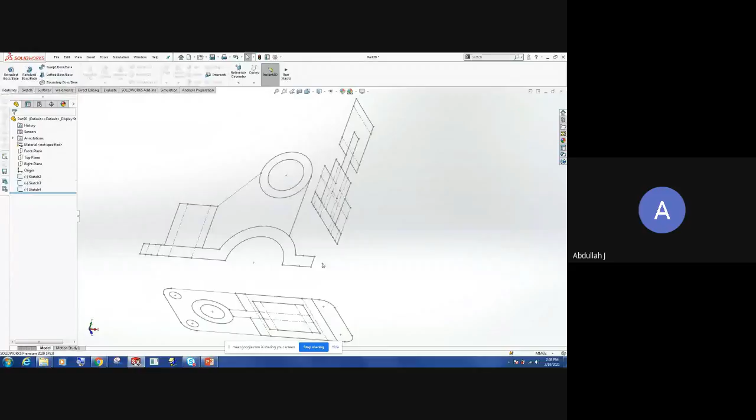Let me check one more time. Okay, no problem. Even this is more than enough for creating a solid model.

For example, from the 2D diagram, 2D data, I just align each view on its respective plane. Now to convert this 2D into a solid model, I can easily use the options. If I want to extrude for the base, obviously if I want to extrude or do any solid modeling operation, I need some dimension. But as per this diagram, we don't have any dimensions.

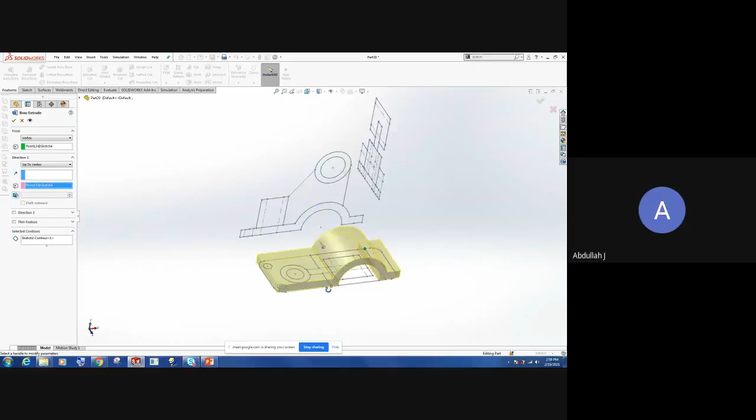In that scenario, we can use these points, the sketch data, as our reference. For example, this base should have a length of this much, so instead of measuring, I can give the starting point. I want to start my extrude from a particular point, maybe I can choose a point, and from here I want to extrude up to this point. So from the existing sketch itself, easily I can predict the reference.

Similarly, that is for the cylinder also. Once again I'm selecting, I want to create the cylinder, I can choose this region. So here for the cylinder, from the top view, we can get some particular location from where to where I need to create it. Here also I can use location points, so I want to start my extrude from this point.

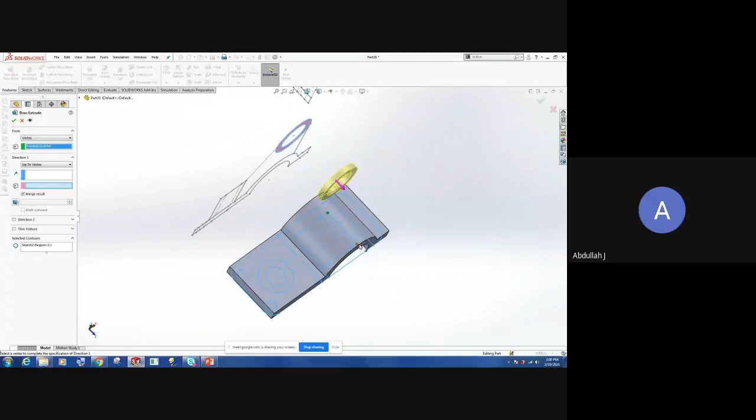Sorry. So if we see here, we are not measuring any dimensions. We don't have any dimension or anything. Just from a 2D drawing, whatever information is available, we are easily able to create solid models.

Similarly, this cylinder, just I want to show you a quick small model. For this also I can choose, we can use any view as our reference.

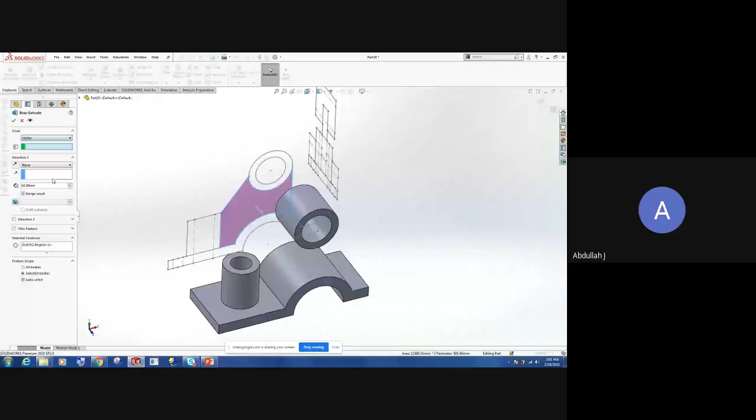Even this rib structure is also easily created. Maybe the top is not visible, I can enable it.

So just with the help of these points, we can get a final object. So this is how easy it is when it comes to converting 2D into 3D. We are not using any dimensions or anything.

Based on the available 2D legacy data, we are just creating a solid model. So whatever operation we need, additional or modifying the geometry, can be easily done. Say for example, if I want to add features like fillets or chamfer, that can easily be done. Whatever modification from the existing object, we generally go with optimizing the overall shapes and all. That can easily be done once a 3D model is developed.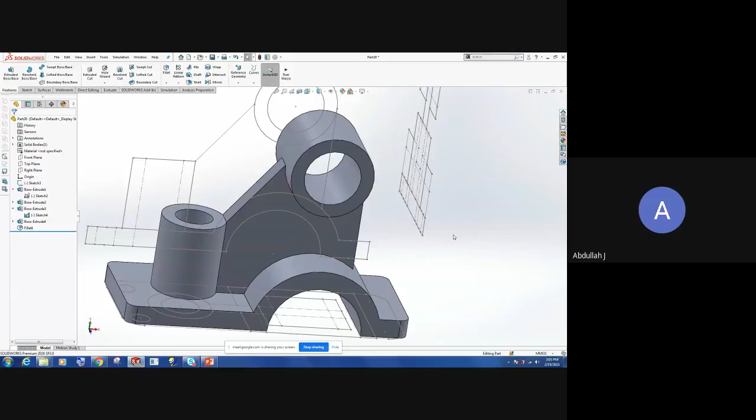Apart from that, once we create a solid model, we generally go for some 3D printing. So for 3D printing also, we can easily do some pre-works in SolidWorks itself.

The major thing about 3D printing is we have to get an idea whether our model is going to fit within a particular 3D printer or not. That's the major thing. Once we understand that, then only can we scale down, and how much I need to scale down is based on the bed size.

Say for example, if we have a 3D printer, we know the bed size or print volume of that particular printer. But in case we want to outsource for 3D printing, we need to search for a particular vendor who exactly matches the specification. If that's the case, we want to check in the SolidWorks environment itself whether this component can be done on particular machines or not.

Then what we can do is, using SolidWorks directly, we go with File, Print3D. SolidWorks has included most of the printer machine data. So most 3D printer data is inbuilt with SolidWorks. The main purpose of this data is that you can visualize the print volume in the design environment itself.

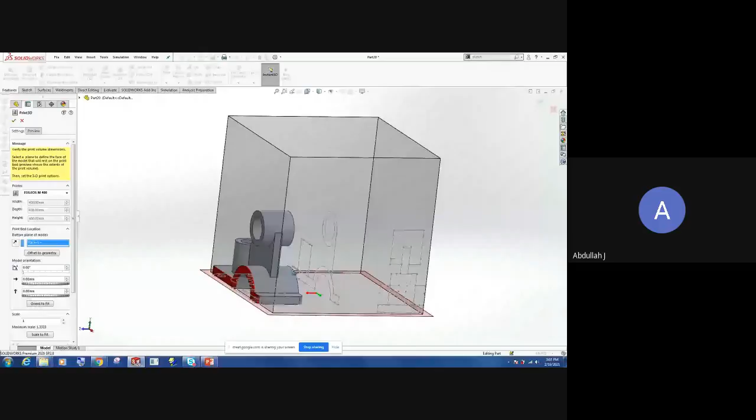But the thing is, our model is not aligned properly, it's somewhere beyond the origin. So we can easily relocate it, transfer the model, translate it to a particular distance. Now we can see whether our model can be printed using that particular machine or not.

It's not only a single machine, it contains an extensive library, so we can choose different machines, select and check. If you see here, in this machine we can't print our model. So all these things can be easily checked in the design environment itself.

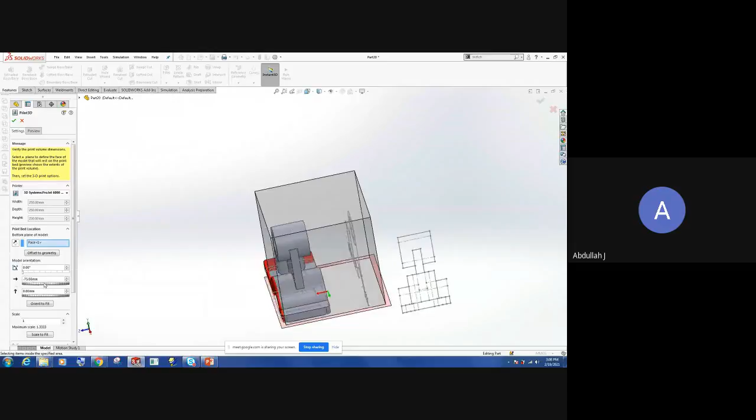If I see here, in only one direction it is going out of the print size or bed size. So if I want to scale it down, we got an idea. I'm going to print my model using this printer only, since these are my available facilities. When we check with that facility, the bed size is not matching with our model, so we need to scale down our model so it can be effectively printed using that particular printer.

In that scenario, we need to think about up to what value I need to scale it down, what value will be apt. Instead of thinking and scaling manually, directly in the software itself we can go with the option called Scale to Fit. Once I give that option, automatically the software matches the diagram to fit within that volume. I think it's considering all the sketches, so maybe I can hide the sketches and all.

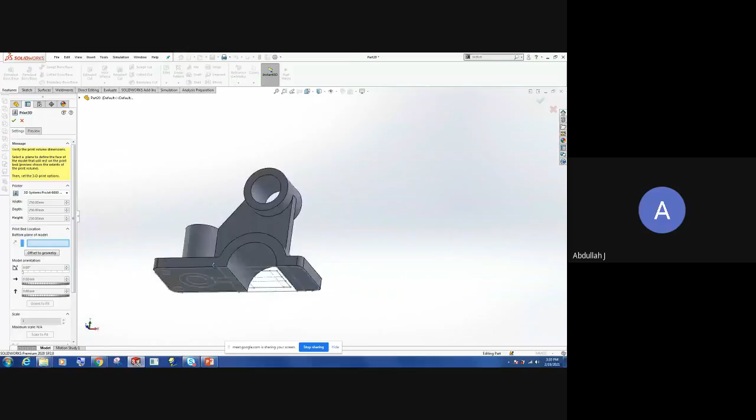Another main problem is our model is away from the origin. So now I can check it.

Once I go with scale to fit, it automatically fits, choosing the effective scale value, 0.833. Manually we need to think about what level we need to shrink or scale down, or what value we need to scale up. So instead of checking like that, we can directly do all those things in here itself.

Even we can check the best orientation. Based on effective printing, I can choose orient to fit, so it can choose the effective alignment and all. So all this pre-work can be done for additive manufacturing, easily in the design environment itself.

Even if our system is directly connected to a printing machine, 3D printers, we can print directly from SolidWorks itself.

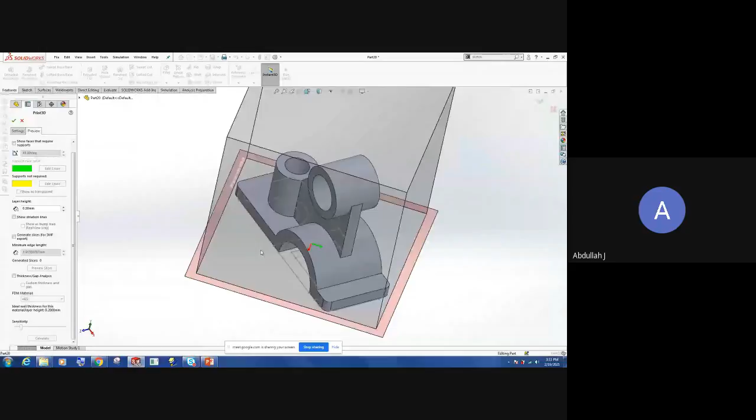Apart from that, we can choose the fill percentage and everything, or preview the slice data. I can go with the preview, and it shows where we need the supports, so maybe I can go with show faces that require supports.

In most occasions we don't need any support, but only on these regions we need some support. That we can easily check here.

We can also check the layer heights, and it can generate slice data. We can see the slice data, and the edge length, everything can be controlled. Even based on the machine, it chooses the material also, ABS material.

Finally, I can go with OK. If my system is connected with the printer, it directly goes for 3D printing. Or else, if our systems are not connected with the 3D printer but we need to give a file to a printing vendor, generally we are all aware that for 3D printing, STL will be the preferred file format.

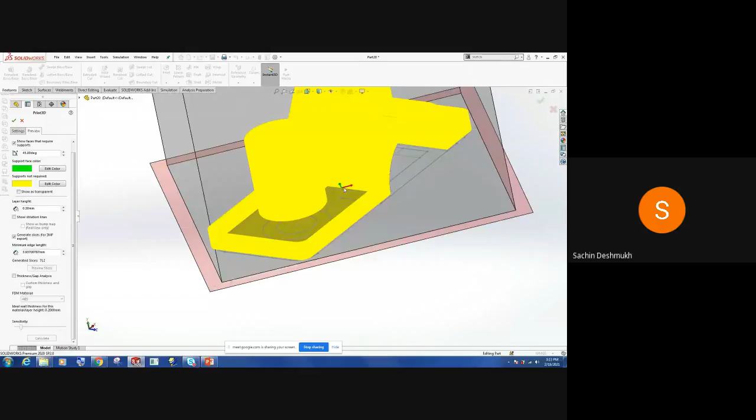Or this one, the plane? Yeah, this is just a reference plane, you were clicking on that. This one - yeah, this is the reference plane. Only that gray area refers to our print bed.

Okay, can you orient this to the bottom? Sorry, no, in that direction, from the bottom of the printer, I can say. Actually sir, this is going to be the bottom of the printer. So which one do I want to orient, sir?

See, the component is rested on the top, the bottom face you need to orient. Yeah, I want to see the bottom face resting on the face. Sir, actually this face is going to rest on the print. Yeah, that is fine, but along with the printer, I want to see it.

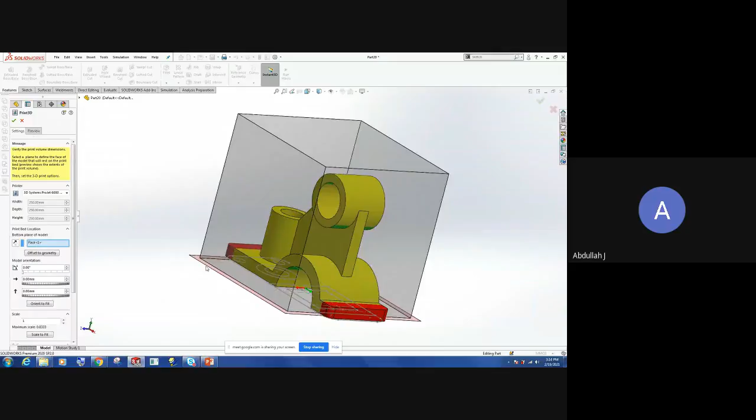Okay, actually here it shows only the volume, so this is where I have already aligned, this is the base. We can't see the whole printer, only the print volume. No, that is fine, but I want to see the base, how the component is rested, correctly or not.

Yes, it is rested on only two faces. Yes sir, these two faces. Okay, fine, so actually it is because it's planar. In other software, it can show all the particular contact points which are rested on the bottom surface. Yes, but here I can see only the corners. No sir, these two faces are only the planar area.

So these are not going to rest, but based on the support, generally for support we can set some angle, only up to this angle deviation. Beyond this limit only we need a support. So actually in real time, this whole curvature we can go with some support, but based on that it is fine.

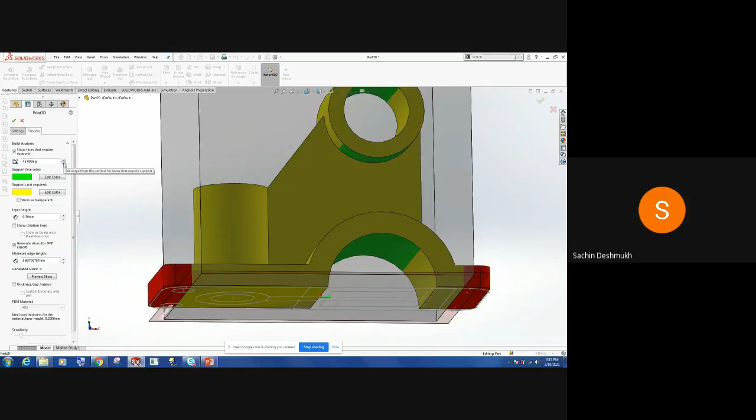I am not questioning that curvature, I am questioning the red portion you are showing, nearby, that it is on the same plane. No, that red, it should show the same color. No, it is rested on the surface properly. Actually sir, this red color shows our model. Did you get what I mean? Okay, sir.

So it should be shown in different color if these faces are contacted or touching the bed. Am I correct, sir? Actually, here there is no color difference, but since we are manually choosing the bottom plane, I can choose the bottom plane. In whatever specialized software I am practicing, not SolidWorks but integrated software, I can see the face is rested correctly, and then we can go for print. Otherwise, we need to orient the model till the face gets rested properly. Whenever we are going with some non-planar model, that will be very helpful, whenever we see if the faces match with the bottom plate or not. But here, since we are manually selecting, it's not differentiating the contacted face.

The session is good, whatever you are saying is understood. See, because everything you are getting in only one software, that is the beauty of this software actually.

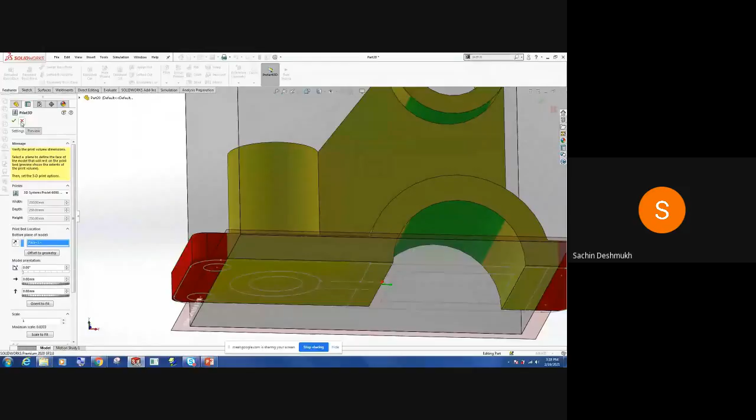One more question sir: can we measure a particular dimension from one face to another face if the model is selected randomly and scan data is available for that? Yeah, we can measure, sir. But to measure, obviously first I need to convert it into a solid body. Then only I can measure, sir. Maybe I can just open a thing. So in general, we can't measure, sir, unless I convert my graphics into a solid body.

So once the solid body is created, we can use some evaluate tools. There are a lot of measuring techniques there. We can measure based on points, location, and everything. Okay, okay, in this way you are going to measure.

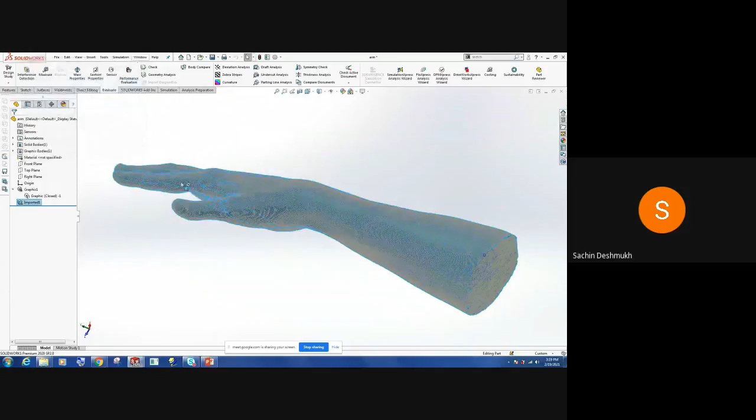But what is the accuracy actually? Did you check something with the actual models and this? Sir, actually the accuracy is based on the scan data only. Generally we tried with some medical components, and those have a large number of mesh data. Generally they use scanners like Artec 3D, so it's captured very effectively. So when we measure with that, the accuracy deviates less than 1mm only.

That is based on the point data. In some occasions these are very large data. Even in SolidWorks, it supports points also. Even without mesh data, we can open the cloud points alone. From the cloud points also we can work on it. Right, just to show you.

So these are just .xyz file format. Generally, whenever we are scanning with cloud points, or even with CMM, now some digital CMMs measure and save the report in .xyz format. That also can easily be opened in SolidWorks. This is the point data alone, there is no mesh data and all.

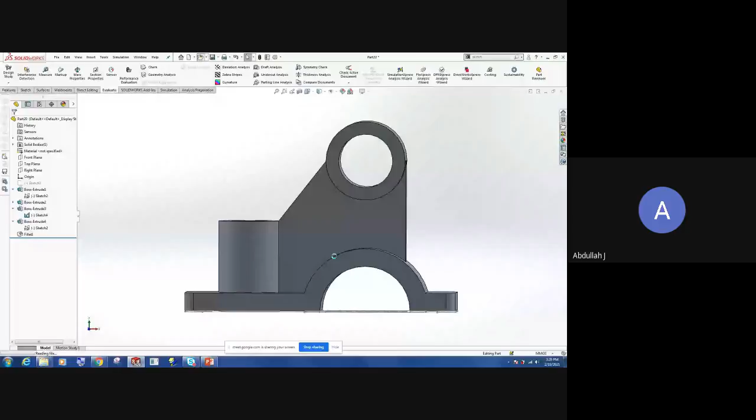So these things also we can work out at a later stage, that's the advantage. Even in some occasions with CT scans, they go with a scan that can be converted into .xyz. Again, from the XYZ that can be imported into SolidWorks, that's the other way. Okay, very good, thank you, sir. Welcome.

Okay, just to complete a few more things about 3D printing. As I was explaining about orientations, the main thing about 3D printers is we generally prefer colors and materials and everything. But whenever we are exporting our file into STL format, it captures only the model geometry data alone. But say, for example, I want to share my model with colors and everything with the 3D printer vendor, then that can also be easily done here itself. So if I go to save to a file...

So there are different formats: STL, .3mf file, and .AMF file. These .3mf and .AMF are recent file formats where we can go with colors and everything for saving our file.

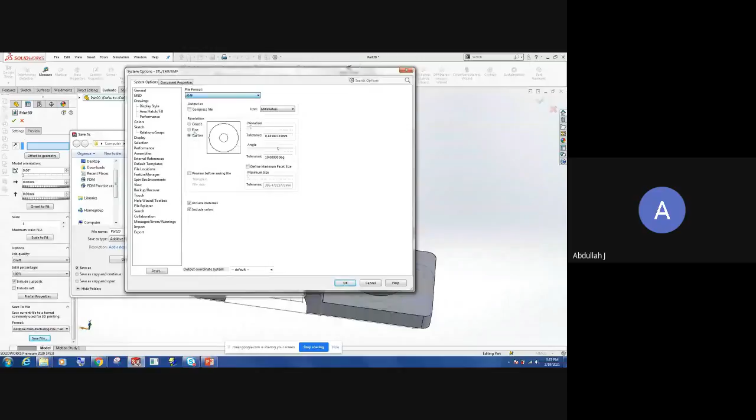Usually we prefer to go with the STL file for open source software. But when giving our file to a vendor doing 3D printing activities, if we want to include the colors applied to our model, we can include material as well as colors. Then it will be very easy for printing, and we no need to explain the color separately. Some 3D printers even support multi-colors. So if I want to give all that information, I can go with the .amf format, additive manufacturing file format, which includes material as well as colors. This can also be easily done for additive manufacturing activities.

So hope with this I can end my session. Is there any queries? Any questions?

This version is the official, licensed version. For students, is there any facility given by SolidWorks to download it freely and work on? If the host institution has the license, there is an option for students to access the student edition freely. Otherwise, they have to pay some nominal fee.

And what are the other alternatives available for these softwares? In terms of SolidWorks, is there any possibility in CATIA or Autodesk or other 3D software? For students, or are you asking generally? Is whatever you have told me, whatever you conducted this session on with SolidWorks, available in other software too? Meaning the 3D printing module.